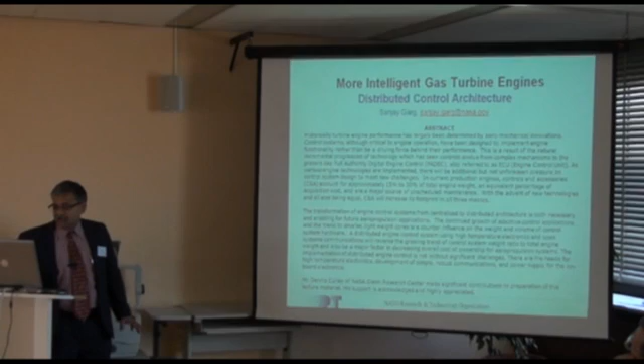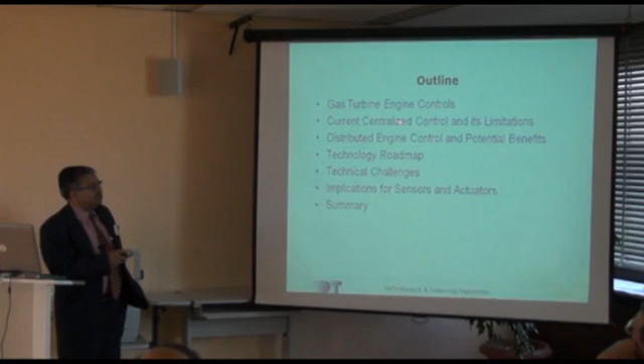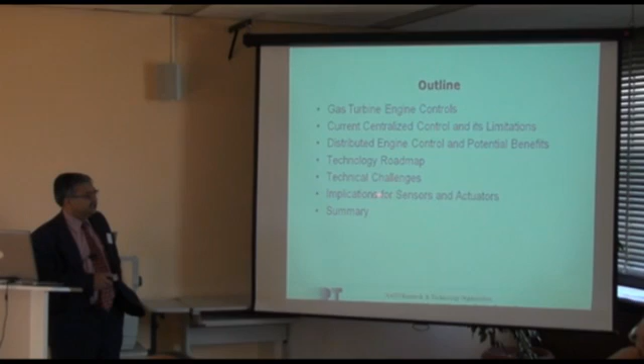So, distributed control architecture. What we've talked about until now was basically the algorithm and the logic, but we didn't talk about the control architecture. Let's talk about it a little bit from a hardware perspective: gas turbine engine controls, the current centralized control and its limitations, the distributed engine control concept and potential benefits, a technology roadmap, some technical challenges, implications for sensors and actuators, and a summary.

But control guys should be given credit for a lot of advancements made in engine operation. The biggest advancement was digital control, full authority, where the pilot can move the throttle wherever they want and the control logic takes care of it, making sure the engine operates safely. Before that, there were a lot of accidents, even with military engines, because in the heat of flying the pilot forgets he's not supposed to put the throttle in a certain setting at a certain altitude and angle of attack, and the engine stalls.

So engine controls have followed a series of revolutionary developments. There was the hydromechanical control, then the electronic/hydromechanical control. When electronic controls came out, people weren't sure they would work properly, so they always kept a backup hydromechanical control. And then now you basically move to a full authority digital engine control.

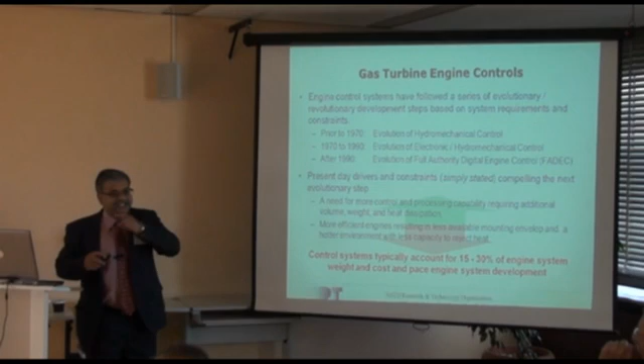What is it called, the geared turbofan, GTF, which Rolls-Royce and Pratt & Whitney are fighting about right now. Rolls-Royce won't build it. They have suits going against each other about infringement of patent rights.

So Pratt & Whitney has developed this concept of geared turbofan, which means a huge fan with a large bypass ratio. But the fan is so huge now that they want the casing to be lighter. You cannot build it with the same material. So they don't want the FADEC putting on the fan casing because it required reinforcing the structure of the casing.

And secondly, it's like a 3-inch box. And if you put the 3-inch box on the casing, then you have the nacelle on top of it. Then the nacelle frontal area becomes too large, so you have too much ram drag. So they say, okay, can't put the FADEC on the fan casing. So where are you going to put it? So that's one big issue.

And even for military engines, the FADEC is fuel cooled. Right now, the amount of heat you can dump in the fuel in military engines, the heat is being everywhere. Everywhere you have stuff, you're dumping heat into the fuel. The thermal management system, there's power electronics, hydraulic systems, you're using it for fuel pumping, so everything is adding heat.

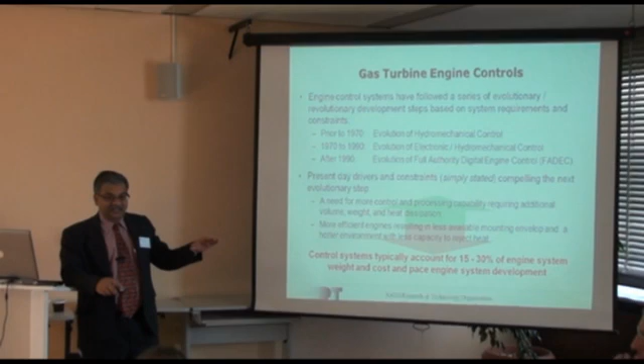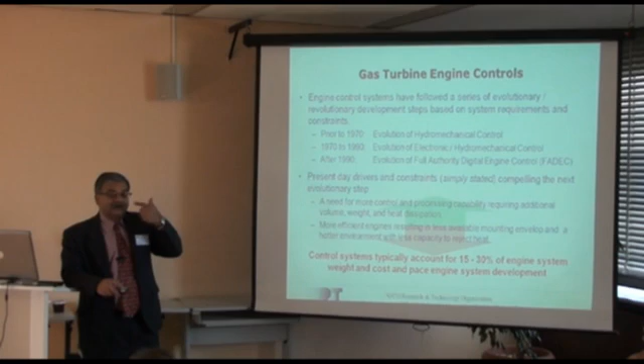The amount of heat you can add to the fuel is driven by the maximum temperature that electronics in the FADEC can operate at. So it's something like 145 degrees Fahrenheit is the maximum heat you can dump. That one is Fahrenheit, because you have to allow for margin. Although the electronics can operate to 150 degrees centigrade, but you got to allow for all kinds of margins. So that's what drives the amount of load you can put.

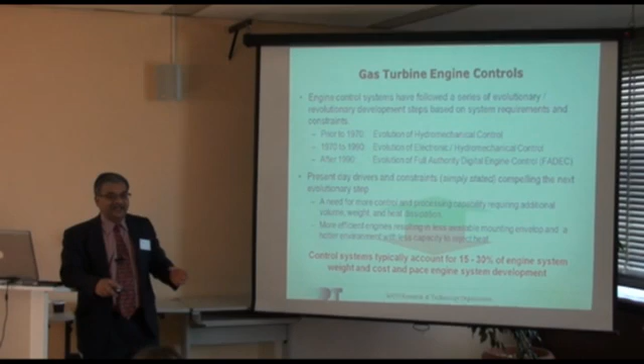They want to put more load, but they cannot, unless something happens to the FADEC. If you remove the cooling requirement for the FADEC, then we can dump more heat. So those are some interesting ideas.

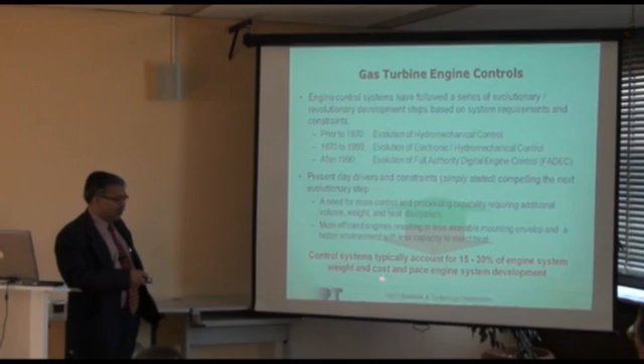Control system accounts for 15 to 30% of the engine system weight and cost, and paces the engine system development. Future engine technologies such as combustion control, flow control are going to be high bandwidth, and you really can't put them in the typical FADEC controls. You reach the limiting of the processing power, and typical FADEC is processing information for your 2 to 3 radians per second control for the engine. These are very high frequency things.

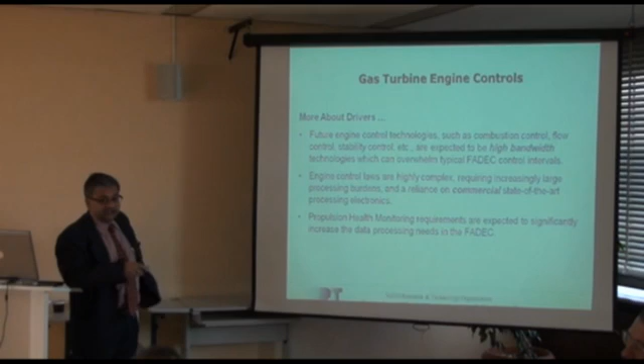So in engine control laws, if you build model-based control, you will need more state-of-the-art processing. Propulsion health monitoring, if you want to integrate with the controls, will make it even more complicated. So you need more and more complicated stuff in there. That's where it is going.

Now what's the problem with the current, what is the current architecture? Although it's called a digital engine control, it's a very analog-based control architecture. There is point-to-point connection from each sensor to the FADEC. So each sensor is an analog connection, this is basically like transducers. And for pressures, you have basically taps, pressure tap tubes going into this, because no electronics can survive the harsh environment of the engine.

Now, if a new sensor, somebody comes up with a new sensor and says, hey, we should put that on the engine.

There's no way to put it because this is already full to capacity. This is a box I certified. When I started designing it, I used the latest electronics. Four years later, I certified it, and my electronics is already obsolete.

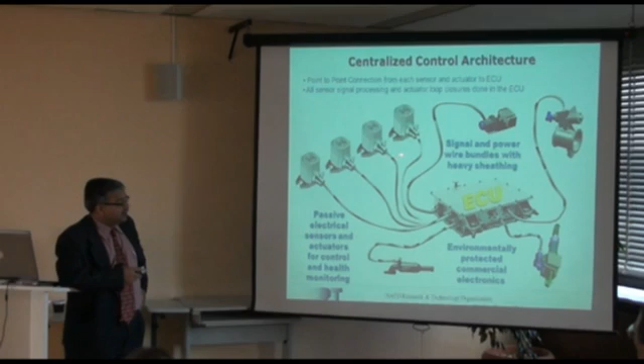So this is the current centralized function. You have a sensor, you have an actuator. All the sensors are basically like transducers - you're getting a voltage signal in there. You do all the power and signal conditioning, A to D conversion, limit checking, scaling. Then they go into control law. Same thing goes for actuator.

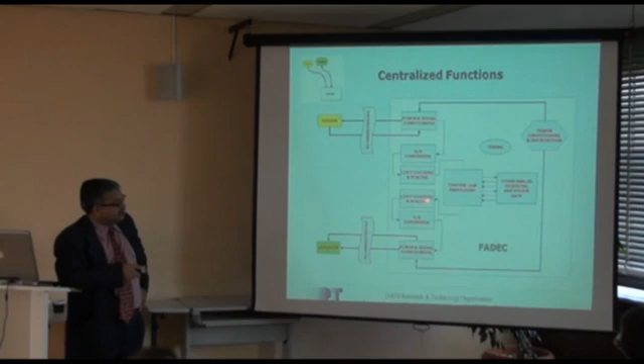You basically have the LVDT feedback. All your control loops are closed out there. And then you have other analog signals coming in. You do the control law processing, and that command goes to the actuators.

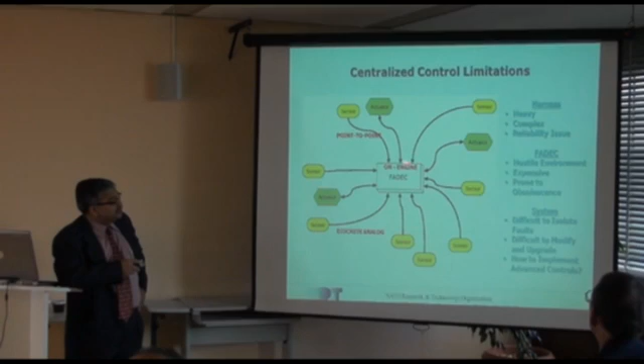Okay, so these are the limitations. First of all, in order to have all these wires, there's this bundle of wire going through the whole engine. So you have a heavy set of wires, very complex, and it's a reliability issue. You have many connectors in those wires.

So if I have one sensor somewhere in the compressor, or let's say later in the turbine area - I have a compressor PS3 or something - in order to take that all the way into the FADEC sitting on the case, I have to build a wire, make it go through different components, more holes in the components and stuff. So it becomes a reliability issue many times because there are many, many connectors.

I think I have a number out there, somewhere around 280 or 320 connectors and pins for the system.

FADEC is built to take a hostile environment. It's very expensive and it's prone to obsolescence. And the system is very difficult to isolate faults. It's difficult to modify and upgrade. And how do you implement advanced controls in the current architecture?

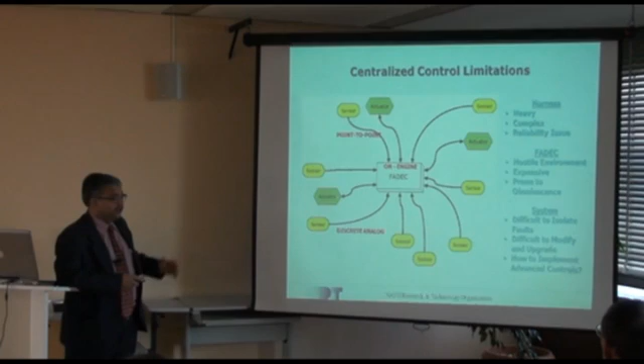Because if you're doing active component control, that doesn't have to be the same level as the central control. So it doesn't make sense to put all the electronics in the box to do component level control. You want to have your control stuff located close to the component.

So the idea is the new architecture suggested is to move to a distributed control architecture where you have smart nodes which enable processing close to sensors and local actuator loop closures. And what you do is define an interface - for each component you define a common interface, and then you put all the data on a digital data bus, and that data then goes into the processing.

So the challenge there is to have some local electronics close to the sensing unit, because you want to be able to process that signal and put it on a data bus. And you want to be able to maybe do some local diagnostics - is this signal, is this pressure, is that sensor still good - instead of having all your diagnostics done centrally. So that's the concept behind it.

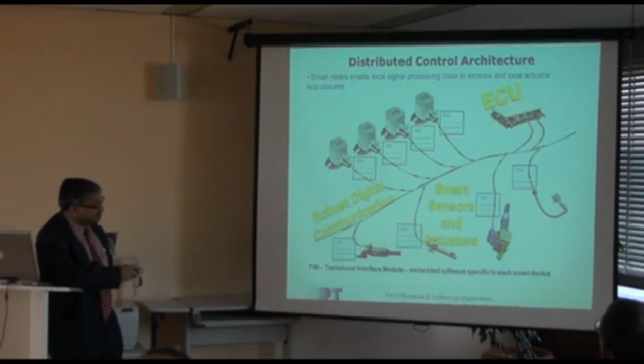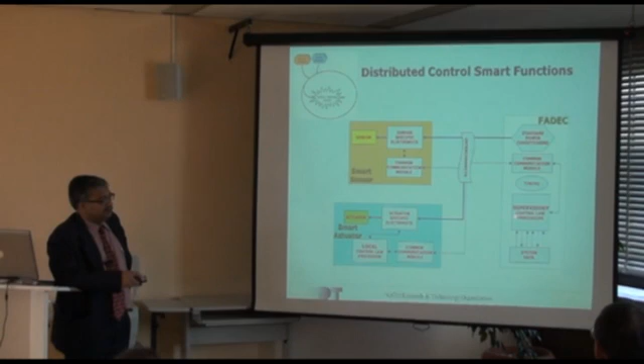So distributed sensor, basically distributed control, you distribute a lot of the functions. A smart sensor would have sensor-specific electronics. It has a common communication module to put data on the bus. The actuator has loop closures locally, and then it puts the data on a bus, and the FADEC function is now reduced - the amount of electronics you have to put in there is reduced because its functionality is reduced.